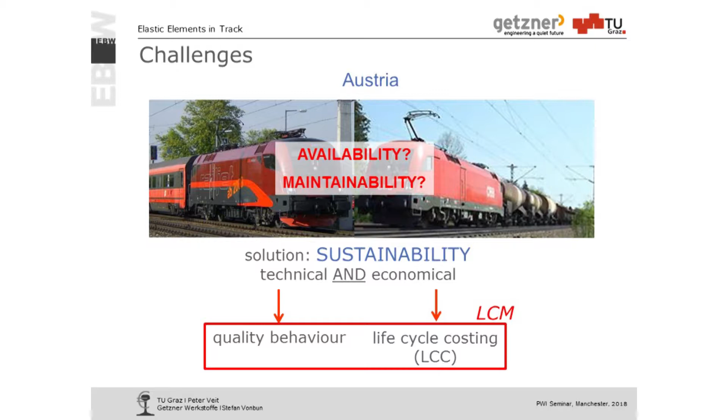This was implemented at Austrian Railways from the year 2000 to 2002. All the regulations turned to life cycle based regulations in investment and maintenance. We call this together life cycle management. It started with a very old experience: a good track behaves quite nicely, a poor one does not.

As I'm academic, we fiddle around with words, we change this sentence to the next, which says absolutely the same: degradation depends on the present quality level. However, if you give this sentence to a mathematician, he sees a differential equation, which you can solve, because the change of quality is constant, and that gives a very simple quality function. So that's just transposing experience to mathematics.

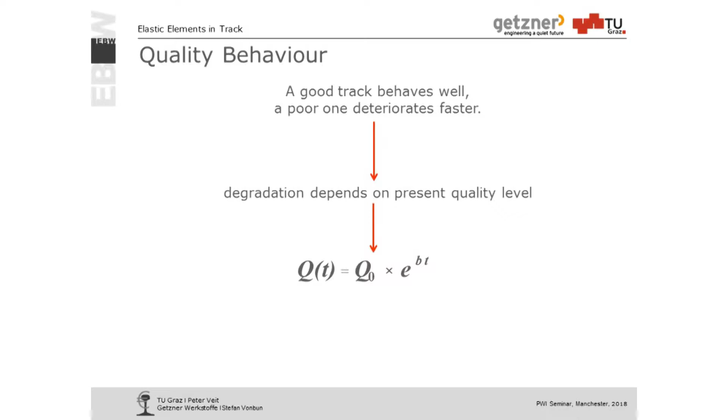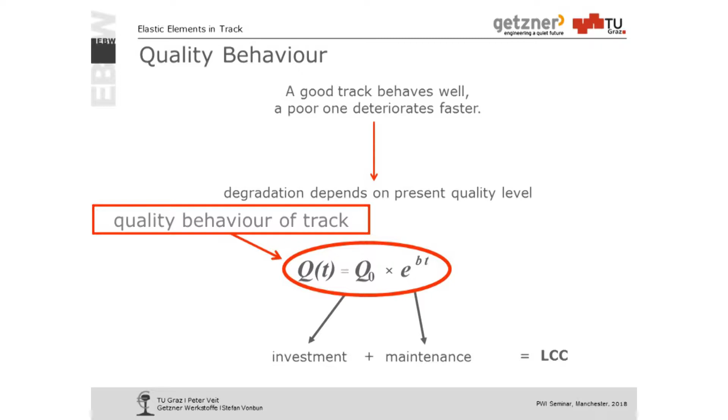This function is quite important, I think, as it describes the total behavior of track, not the components' behavior. It contains the initial quality, meaning it contains investment, and it contains maintenance, because that's E to the power of bt. T is time, B is the rate of deterioration. First of all, we learn we cannot split investment and maintenance.

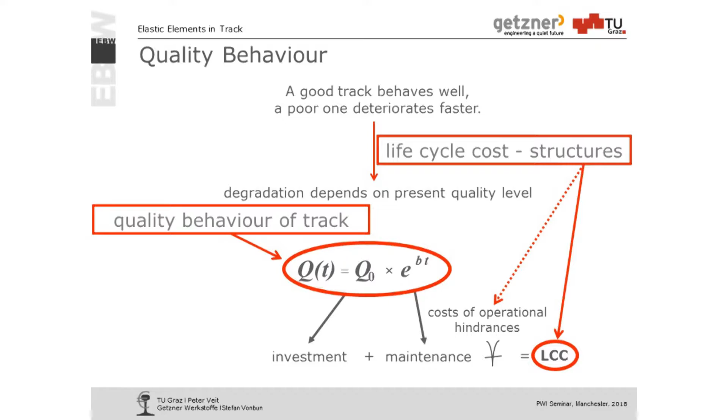Second, this is describing nearly the life cycle cost—just nearly, because we always take into consideration the costs of what we call operational hindrances. In fact, that's the cost of non-availability due to track work executed, or due to track work not executed and then running slow. These costs are taken into account as well. So we can use this technical function as a function for the economic description, as well, since the economics must picture the technical situation.

What's the background of that? And that's a very nice background. We have the data from the Austrian Federal Railways. It's not a very big network, but a densely used network, 4,000 kilometers of main track. So that is all the track where really big traffic happens.

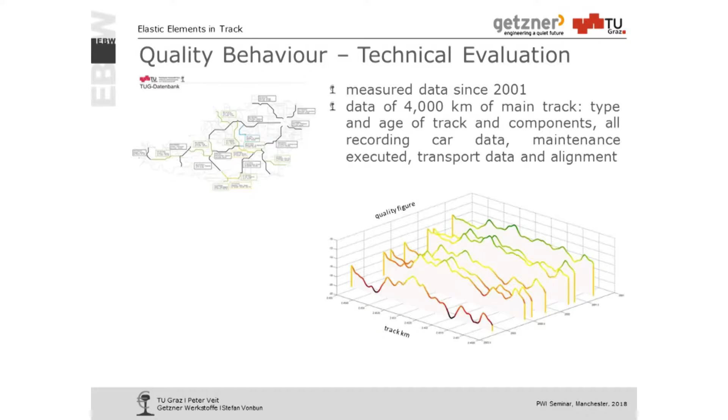I have the data of track type, track age, components, all recording cars. We run the recording car between 3 and 4 times a year. Then the maintenance executed, the tamping, the alignment, and so on. That's nice data. But what makes this data really nice is that we have got these data in a time sequence from 2001 to now.

And that gives appearance about behavior. So whatever quality figure or measurement car figure, we look at it over time, we look how it changes. And this gave us that formula as well, now in a data-based situation.

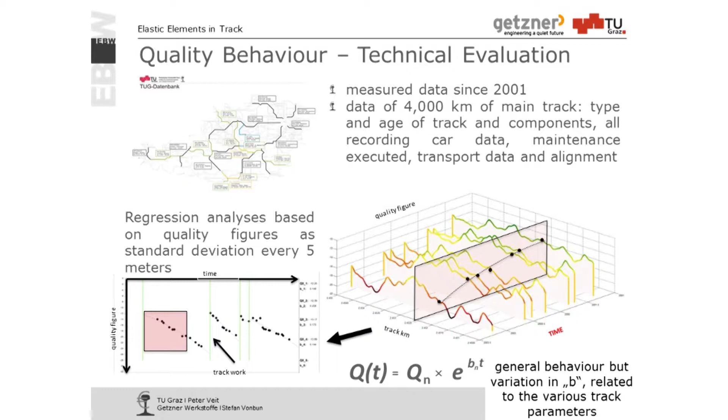But we have to take into account that this rate of deterioration, the B, is very much related to all the boundary conditions: traffic load, subsoil, dewatering as the biggest impact, but also, of course, all types of superstructure. And we can do analysis for that and get some pictures like this, so we see how it deteriorates. There was maintenance and further on and further on.

We discussed which parameters we have to take into account—that's the most important ones, there are more. So it's of course traffic load, it's track number, although the track doesn't know that there's a twin on the side, but the costs do know it, so we have to take it into account. Then it's the rail profile, steel grade, sleeper type, radii, rails. We practically do not have jointed rails anymore, and it's subsoil condition.

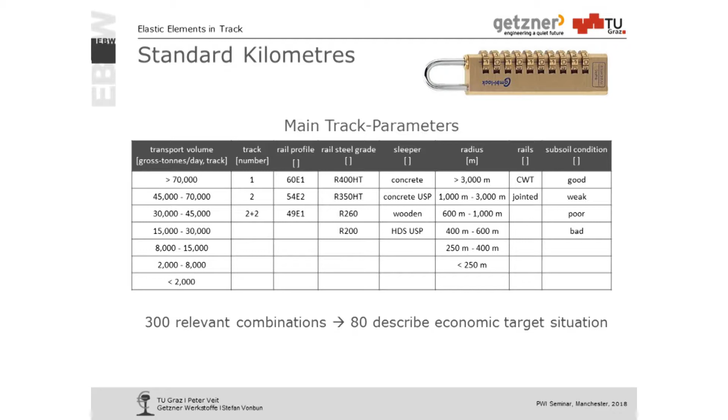A lot of possible variation. A lot of these possible variations are not normal—you would not run 60,000 tons a day on 49 kilo rails and jointed track. So a lot of combinations are not reality. 300 remain, 80 we needed to describe the network. So we see our network as a sequence of different standard elements.

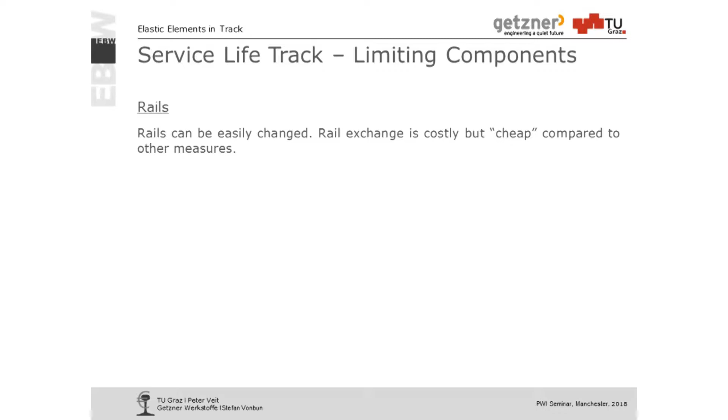That's done for track and turnouts, of course. The next thing was to think: what is the life-limiting component in track? It's not the rails—the rails can be changed quite easily. It's not the sleepers.

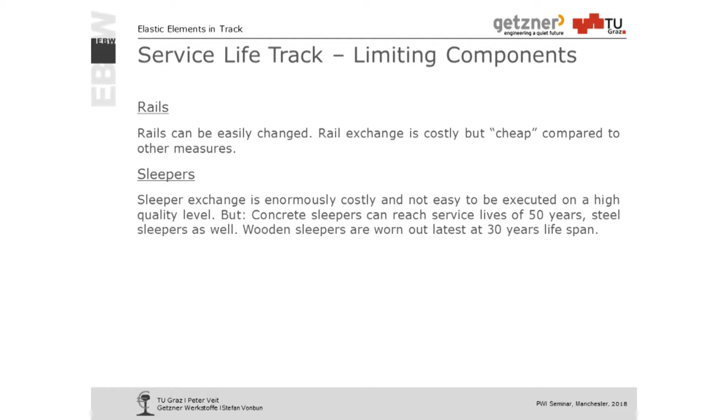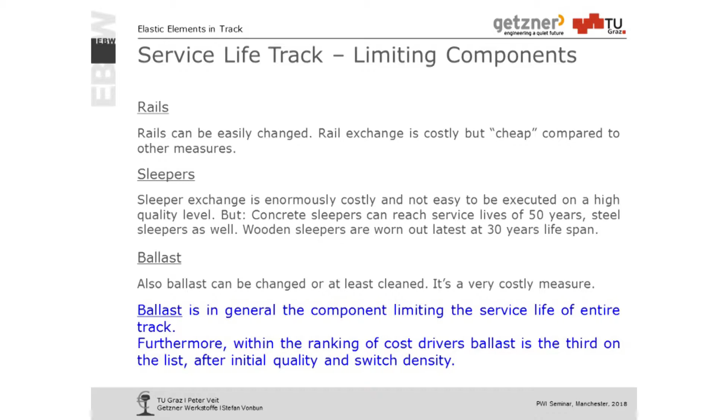In normal conditions, even concrete sleepers have a nice service life, except when we put them in water. But it's enough, and concrete sleepers still have enough service life, more than the track. Remaining is the ballast. We can change ballast, but that's so costly that normally this is the reason for ending service life economically. Either the ballast is rounding and doesn't stay stable anymore, or the ballast bed is filled with fines and you cannot tamp it anymore, or it has no positive effect anymore, or very little.

That is the basics of all our calculations, all our life cycle strategies which we build up for the Austrian railways. So we have one deterioration function which describes entire track behavior, and this gives a limit for service life. Of course we then have to add all the components, because we might have to change one or the other component in between. So we have to do the prognosis for all components, but the main thing is we first need a description of the entire track. Track is not just a chance mixture of components, it's a civil engineering building.

Unfortunately, from my knowledge, it's the only civil engineering building where it happens from time to time that we believe we can build it without a basement. That gives remarkable problems. So we put a lot of time into looking into graphs and analysis for subsoil behavior and things like that. This has been executed in Austria since 2011, where all major projects are tested for optimal service life.

What I would like to show here, and that's the headline of today, is the elastic elements we proved under sleeper pads in Austria. The test started in the beginning of 2000. In 2007, it became general regulation to use it for concrete sleepers. First it was for the higher loads, because you get the best benefits there, and now it's spread to all concrete sleepers. There is still a limit, so we don't use it for concrete sleepers which carry less than 10,000 tons a day, but we don't have concrete sleepers with less than 10,000 tons a day, because that's the limit to use concrete sleepers, so we use it practically everywhere.

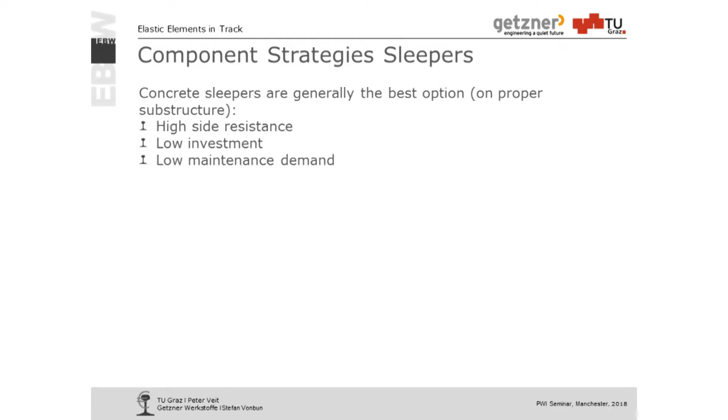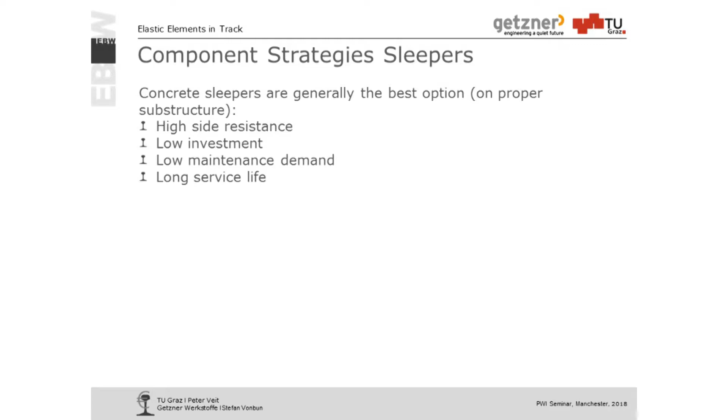They have a long service life, normally longer than the track, but they have a big problem - the high deterioration of ballast. This is a technical problem, and it is a very big economic problem, as this is exactly the component which is limiting our service life. So the idea was how to make that better.

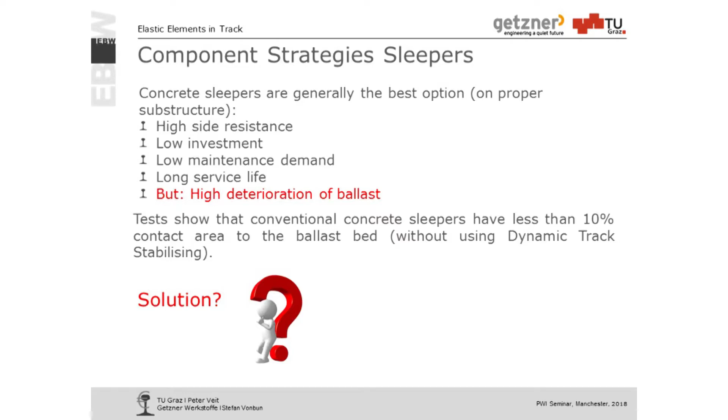The reason for that problem was that we have just roughly 3 to 5% contact area between concrete sleeper and ballast. If we use dynamic track stabilizing, we can double the figure, but that's still just 10%. And if you take the calculation of track, you use much more contact area in calculation than in reality. So the idea was to use an elastic element, more or less, to distribute the load better.

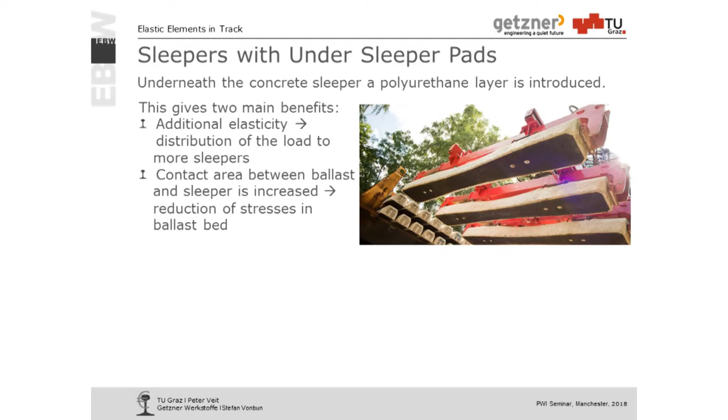First of all, this additional elasticity distributes the load to more sleepers, taking away the peak load under the sleeper. And it gets more contact area between sleeper and ballast. Or to say it another way, we try to get the benefits from wooden sleepers towards the concrete ones.

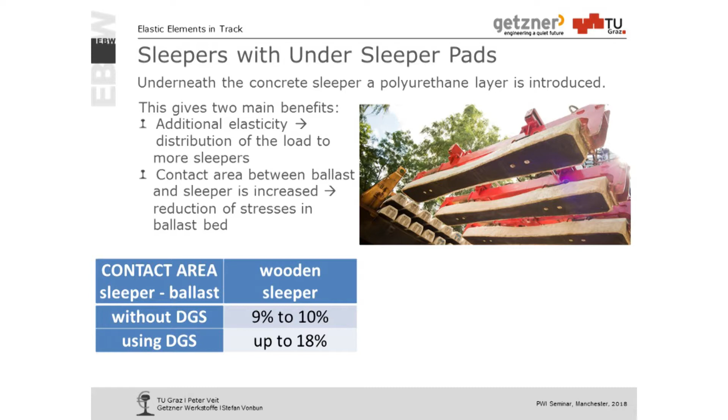I took here some figures from the testing results. Without dynamic track stabilizing, the wooden sleeper has up to 10% contact area. Using dynamic stabilizing, you can roughly double the figure. The concrete sleeper is quite poor in that - this is a picture where you see the contact points, and it's only some contact points. When we go for concrete with under sleeper pads, we come up with dynamic stabilizing up to 35%. That gives a big increase in area, a big decrease in stresses in ballast. Suddenly ballast starts to work as ballast and not just as a single force path.

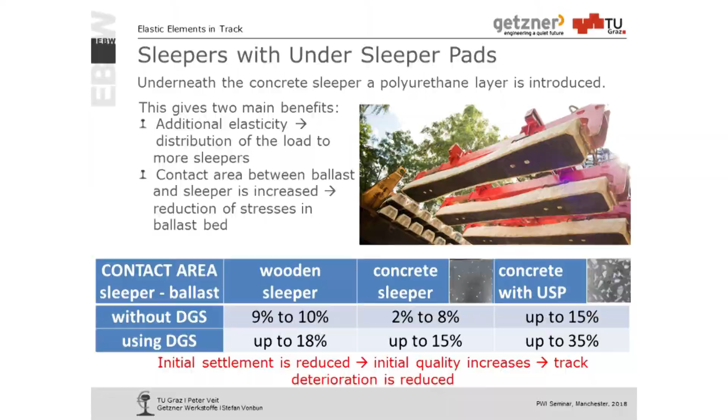This reduces initial settlement because you have more stones in contact from the beginning. If we have reduction in the initial settlement, we have reduction of the differences in the initial settlement between the different sleepers, as this settlement is random. Therefore, we can increase the initial quality. That's an expectation, and if that happens, we should decrease the deterioration rate. It was at that time also an expectation, just telling about the stresses and the contact area. Of course, if you increase the contact area, the stresses go down in the ballast.

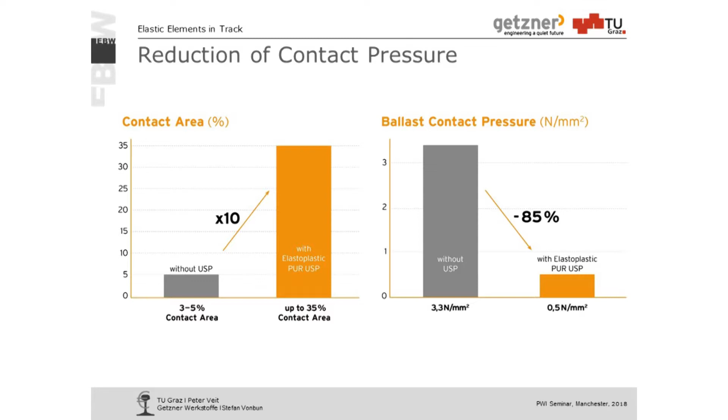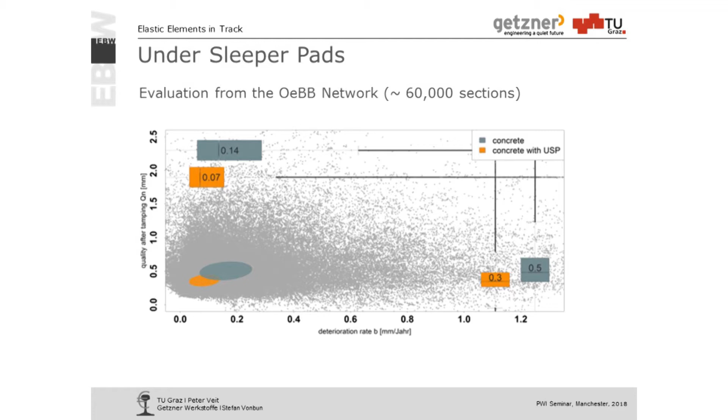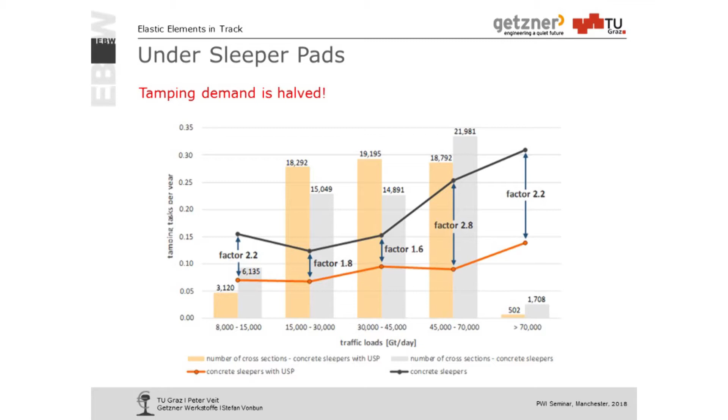We looked at tamping demand. That's again the 60,000 samples. We have the sections with under sleeper pads and the sections without under sleeper pads. And this is not expectation - the last two slides are not expectations, that's test results. We could spread the cycle of tamping by that factor. So we go for tamping roughly after double the years, without loss of quality. Otherwise, we would not benefit in service life.

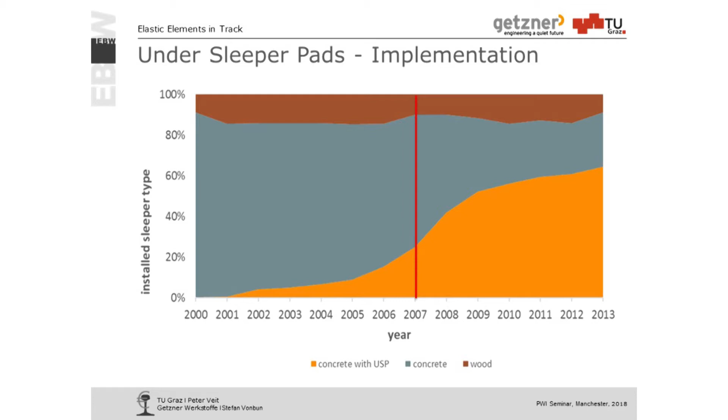That gives single failures, but you see it's quite well implemented. And what does it mean in cost? Within that figure, it's all the proof and examples for maintenance, just the relation between maintenance and service life, which we could figure out on a lot of analysis, is still a calculation. Of course, we did never change this track, it is too new. But if we look to a normal reference track and see that's annual average costs seen over service life, the total ones, it's built up the biggest portion up to 50%.

In turnouts, it's more than 50, it's 60 to 70%. That's just depreciation. So track is expensive and keeps long. That's the good thing on that. Then we have maintenance cost, which is the reference regarding a track used by 150 trains a day, one track. So we have maintenance cost, which is about the same as the costs we put to the operators in disturbing them. Of course, if you go to a branch line, the blue bar disappears. Let's say, in bad words, if no train coming, no train is delayed. But in main lines, it's really an important part.

Doing this prognosis, so the maintenance is already proven, doing the prognosis, we can reduce the annual average cost down to 68%. That gives internal rates of return for the additional investment of 20%. Imagine we invest 5% more, half the maintenance, and increase roughly 25% service life.

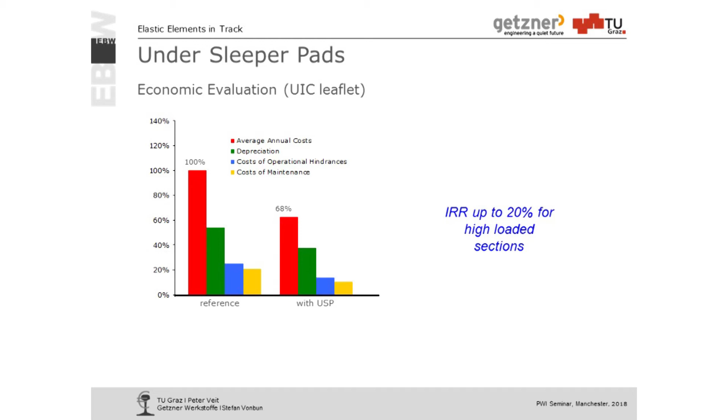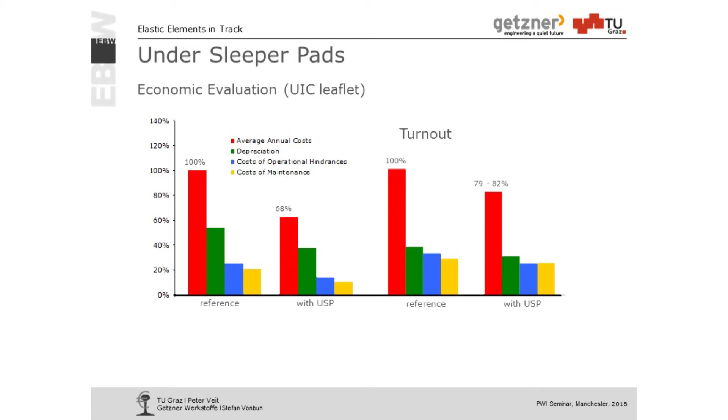So that's beautiful. We did the same thing on turnouts, and we expected more savings in the turnouts as they are more sensible. It was not like that. It is in absolute figures, because this 100% is roughly 11 times higher than that 100%. So in absolute figures it's more, but relatively it's less. The reason is only if you can save the ballast in track, you can increase service life, and you do not need to do big new maintenance. When you increase the service life in a turnout by 20%, you most likely have a frog exchange or some expensive maintenance additionally. But still, it gives beautiful savings.

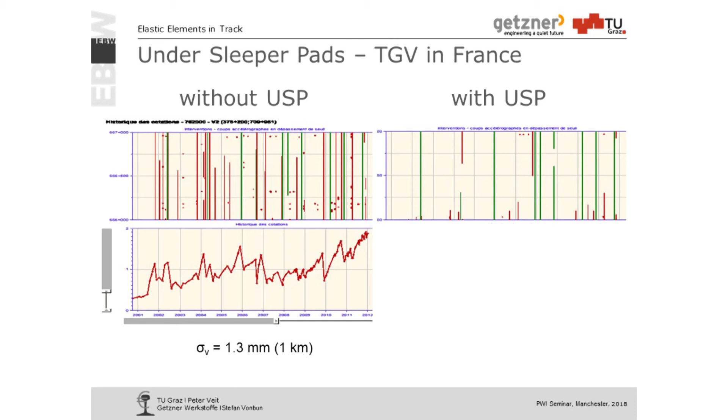And to show you that's not just in Austria, in 2013, the French got it into their regulations, only for TGV lines. They made a 10 years test, of course, not telling that to anybody, but it was a test of 10 years, 1 kilometer. Here you see the standard deviation. You see all the red marks are tamping actions, the green ones are grinding actions. By the way, you see if you combine it, it gets the best. That's another strategy which is already implemented in Austria. We put it together. On the test section with under sleeper pads, they did less work.

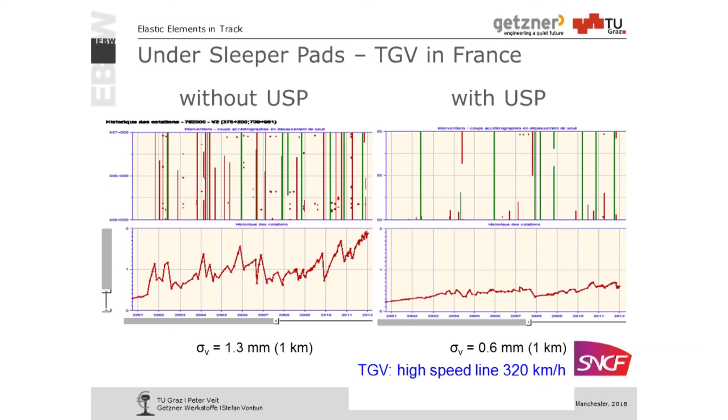This doesn't tell anything, but if you know or if you see that the change of standard deviation, so the behavior in that case, I think the graph really becomes quite impressive. Thank you.